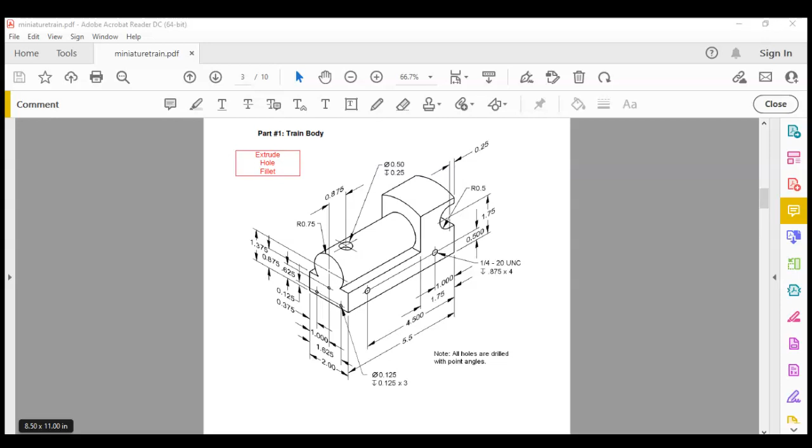I'm showing you this. If you scroll down to the next page, you have another view. There's some stuff you'll need on the back of the train body.

Like I said, it's kind of intimidating. But if they can break it down to things they can determine and know for certain, it makes it a little easier to draw. So what I always look at first is, what do I know? I know that the base of my train is a rectangle.

I'm going to just kind of roughly highlight what I'm talking about here. I know the base of this train is a rectangular shape. And then if you think about carving away the rest of the shape from that, you'll have an idea of how to go about creating the train body.

I know my dimensions for that base rectangle: it's 2 inches by 5.5. There are some other things I can't quite determine yet, but I know that the base is 2 inches by 5.5 inches.

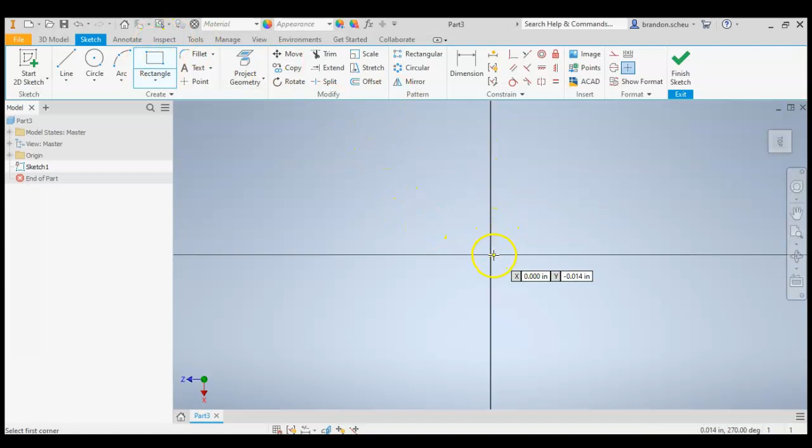I'm going to create a 2-point rectangle. I'm going to start at 0, 0. If you hover over 0, 0, it'll turn green, so I will click and drag. This is a 2-point rectangle, so I'm creating one corner, then clicking and dragging, and I can set the opposite corner.

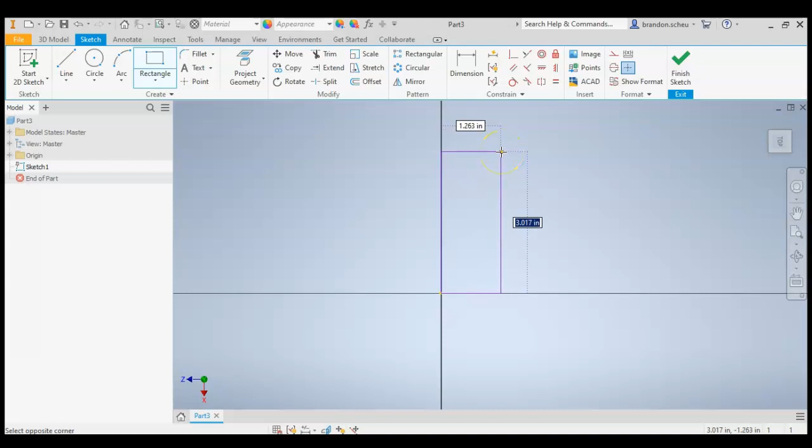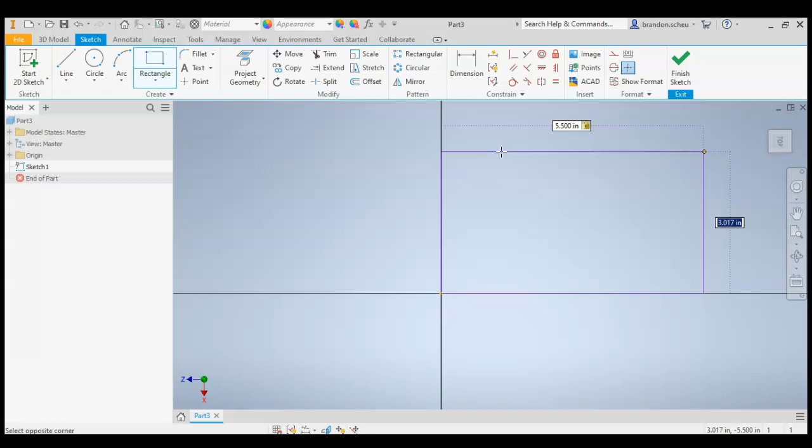My dimensions right now, you can click and drag and see it changes. I can use my tab button and tab in between these two. It probably doesn't matter which one you make the 2-inch and which one you make the 5.5. I'll make this 5.5, then tab, so it highlights my other dimension. That is now highlighted, so I'm going to change that to 2, then hit enter.

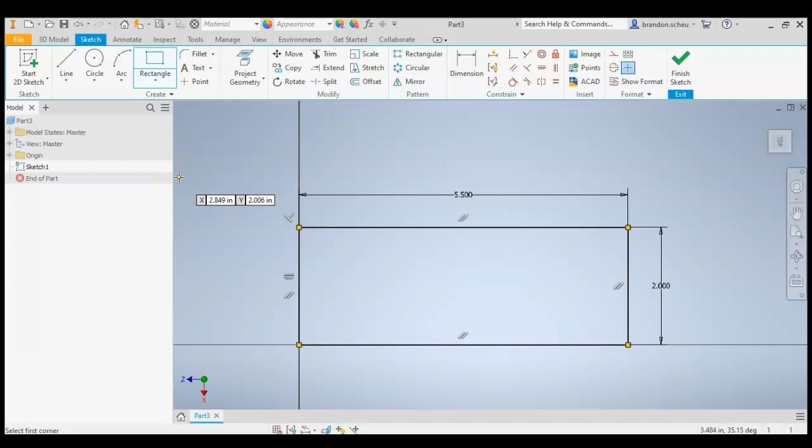Now I have a rectangle similar to my base, the same as my base. It's 5.5 inches long, 2 inches tall. Then I'm going to hit escape, which turns off my tool. You can see my rectangle tool is highlighted here. Hit escape and it turns it off.

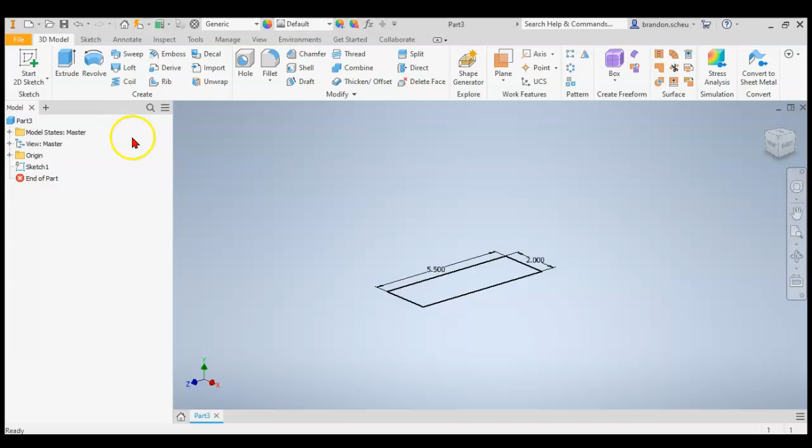Now, if I want to finish this sketch, I'll click the green check mark, finish sketch, and now I'm able to proceed in the 3D model tab. So if we look at it, we know we have now a profile of the base of the train.

I don't have a dimension telling me the exact height of my train, but I have two dimensions I can use to figure it out. I need to know the height of the top of my cab on the back of my train to make sure I have enough material when I extrude.

The top of my train is curved. It's 2.35 with an R next to it. This mini train project is one of the things students are learning—specifications, symbols, things like that. That R stands for radius, so essentially that's just the arc, or a circle with a 2.35 inch radius. That's important to know.

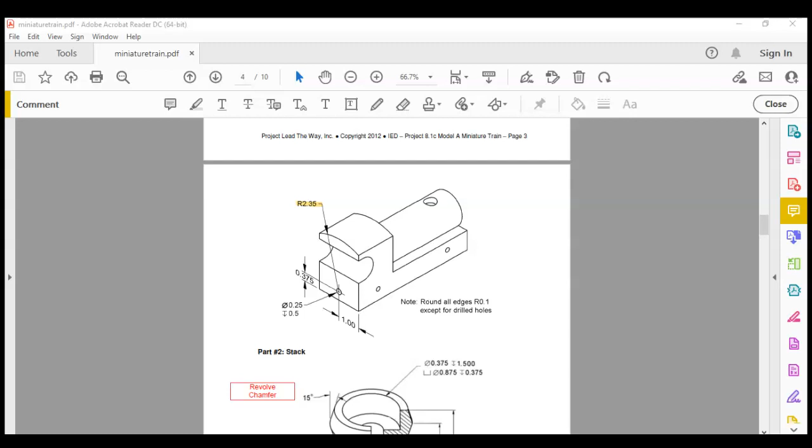The center of my circle—I'll zoom in here—I have a 2.35 radius for the roof, and the center point is 0.375. I'll also have a hole here on the back with a diameter of 1/4 inch and a depth of 0.5, centered at 1 inch and 0.375. But right now I'm making sure I have that covered.

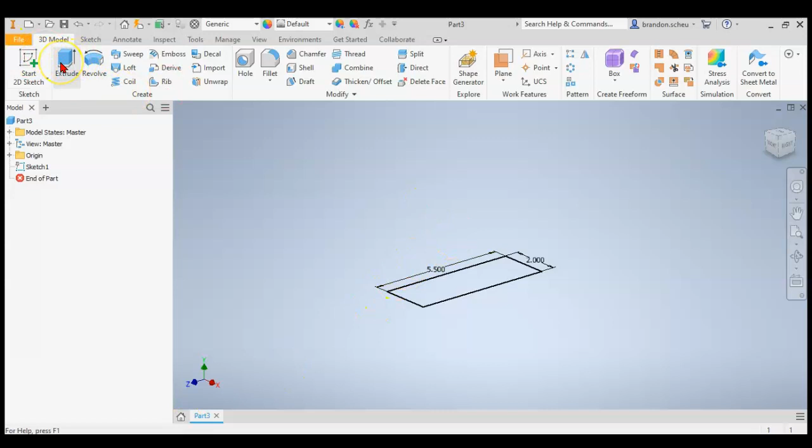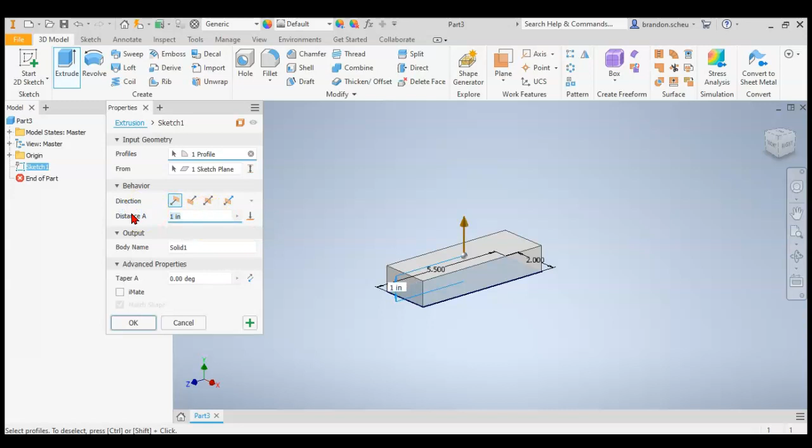I'm worried about extruding and getting plenty of height that I need to work with, so I'm going to extrude. Extrude adds or removes material, so I'll add enough material that I can come back and remove the excess later. I know I need just under 3 inches total height, so I'll add enough—I'll do 5 inches, enter.

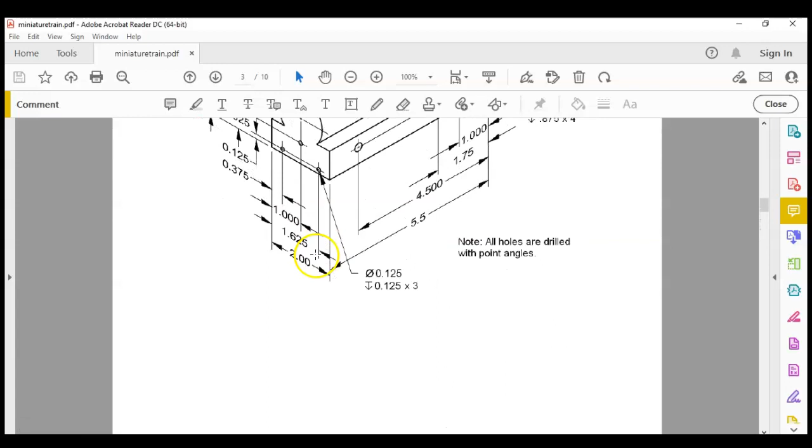Now I have a solid 3D model that I can start creating the rest of my train body with, the rest of the shape. I'm going to try to move this drawing tab out of the way. Now I can create my roof, and I can create the hole here, and then I can create the front profile of my train.

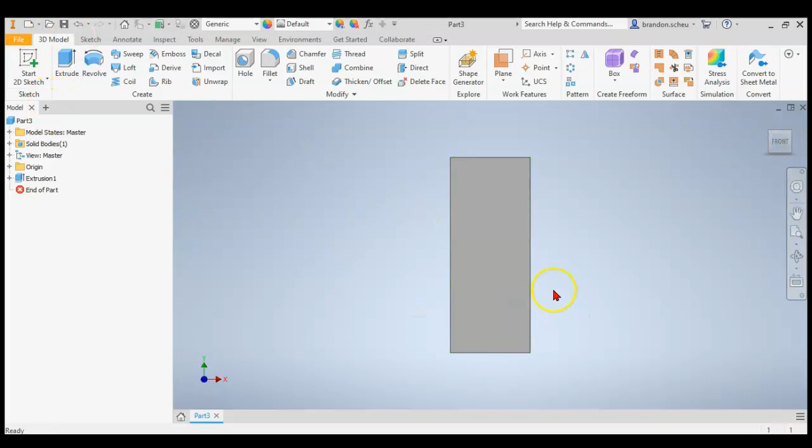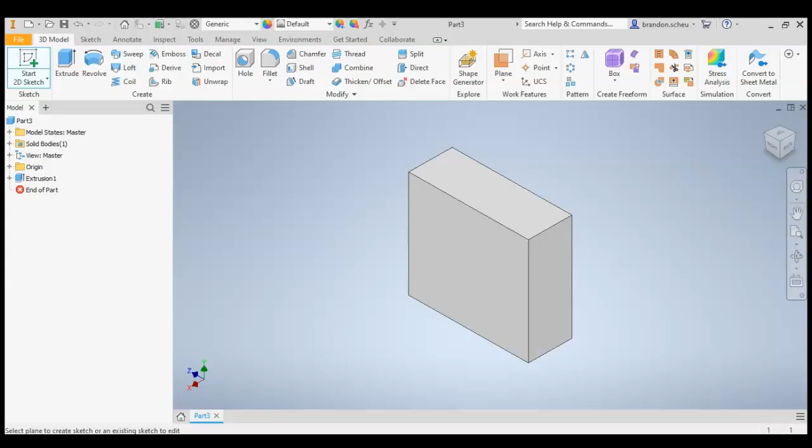Once we have a 3D block to work with, I can start a sketch on any of these faces using the little cube here, where I can click to get different views. I'm going to start on the back view. So in this view, we're working off the back—I'll select the back, start 2D sketch, and then project geometry.

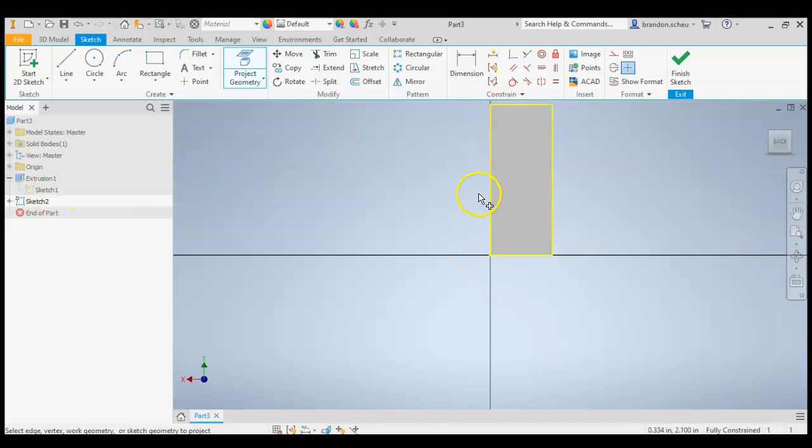Project geometry allows you to reference geometry from a previous sketch. I'm going to project geometry—it's referencing what I extruded here off of sketch 1. I'll select all 4 sides; you can select individually if you want, but I want all 4. What I'm going to do first, which saves time, is the hole here for the hitch peg.

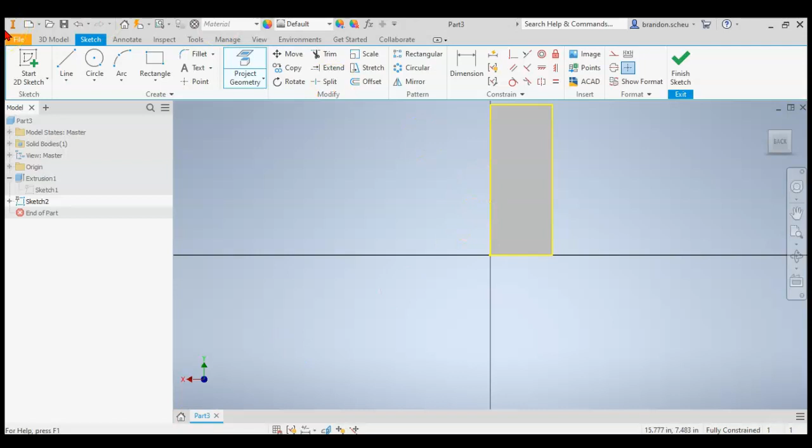If I do that first, then I can reference it to do the roof. If I did the roof first, I'd have to do this twice. I'm going to select the point—you can do a circle, but I'll select the point. With the geometry referenced, it'll click at the center point. Going on my X here, the width, it'll click at 1, and I can tab to take me to the coordinates. I know the center point is at 1 and 0.375.

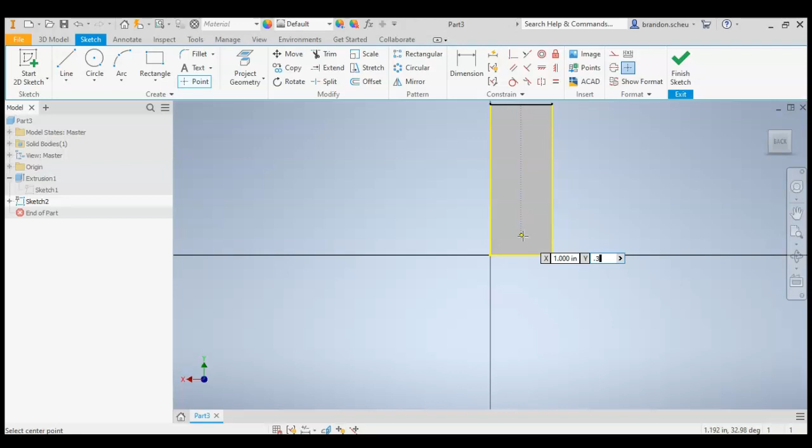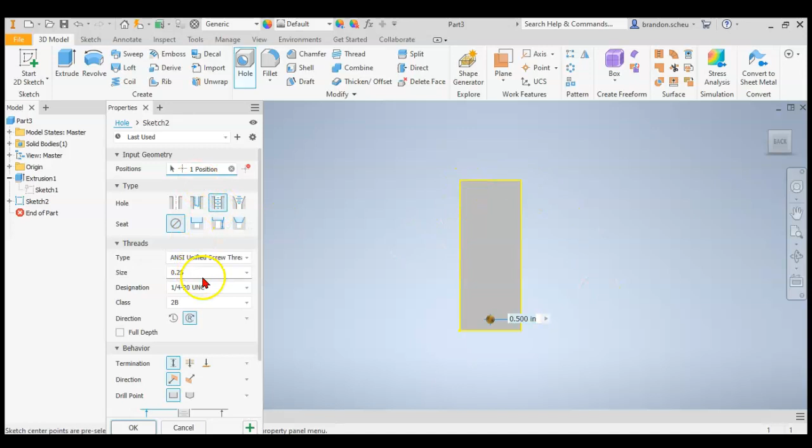I'll select, hit enter, then finish sketch. I'll go to the hole tool—I know this hole is 1/4 inch by 1/2 inch deep. I don't want it threaded, so I'll go to simple hole, and I don't want a seat. I want to specify the distance: 1/2 inch deep, and it's 1/4 inch wide. Then I'll hit OK—that gives me my hole for my hitch peg, with the diameter and the depth.

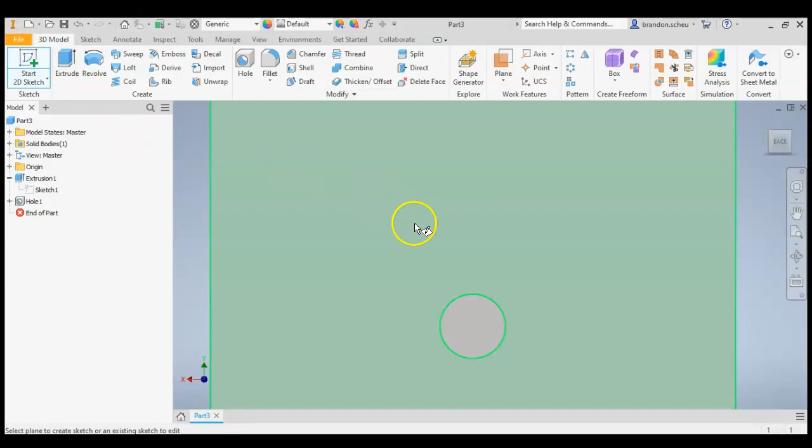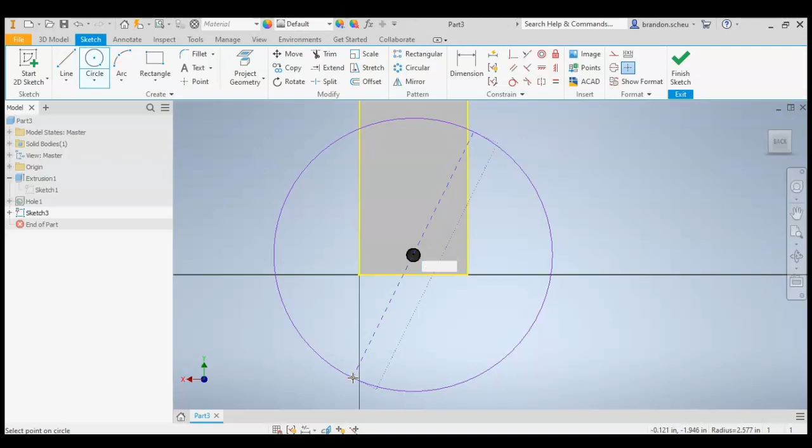Now I'll come back and start another sketch. I'll project geometry, and then just create a circle—you can use an arc as well, but a circle is a lot faster. In my drawings, it's a radius of 2.35. My circle's dimension is diameter, so I'll do 2.35 times 2 to give me the diameter. Now I have a circle, or really the arc, on my profile.

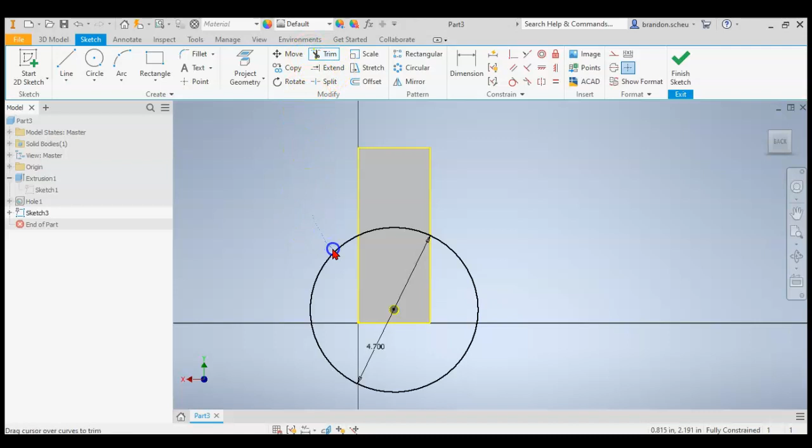To keep things nice and clean, I'll use trim—trim the excess, and then I have my arc. I'll finish sketch, and then extrude. If I hover over each of these closed profiles, it highlights them green. Green means I'm adding material here—I want to remove.

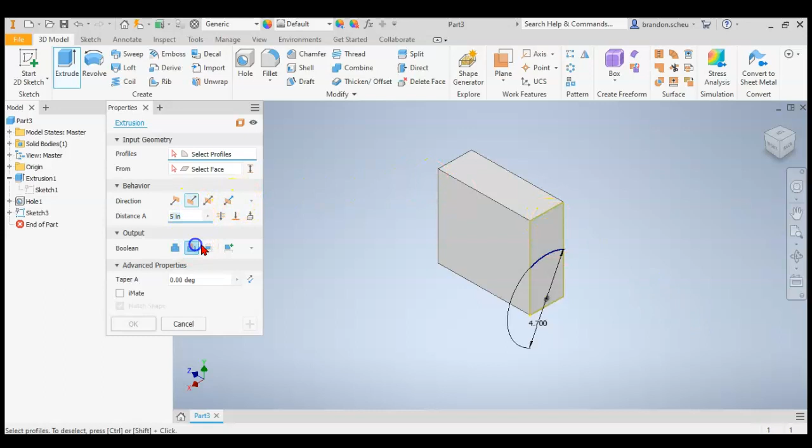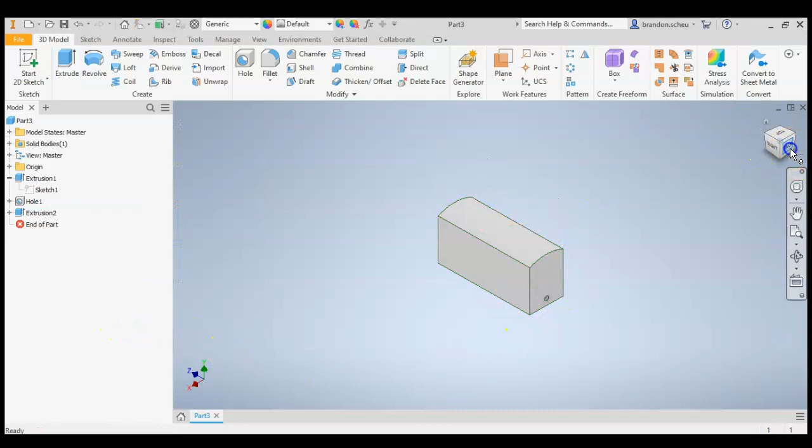I'm going to select the entire distance, so I'll go 5.5 inches. You can go more, that part doesn't really matter in this instance. Now I have the profile of the roof of my cab of my train. There's a lot more work we'll need to do, but I have the profile of the train.

Now the next thing I'm going to do is work on the front. The front's probably the most intimidating to a lot of students because there's a lot of numbers and a lot of lines, and they're not real sure on where things are supposed to go.

So I know I have two basic shapes, a rectangle and a circle. The center of my circle is at 1 and 1.375, with a radius of 0.75. Then I have a rectangle that is 2 inches wide by 0.875 inches tall.

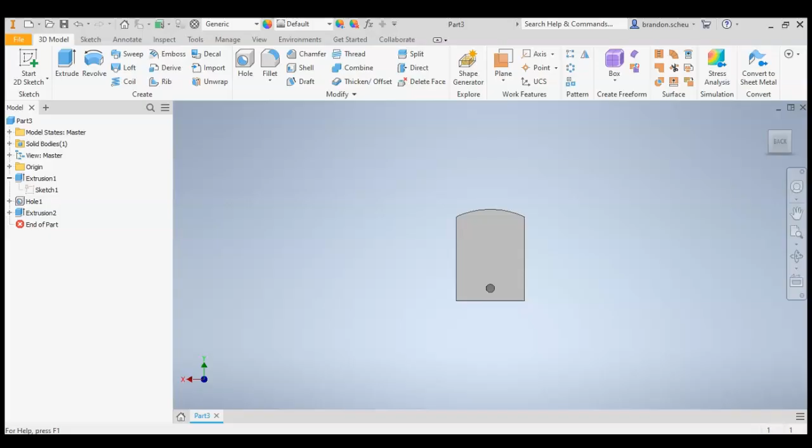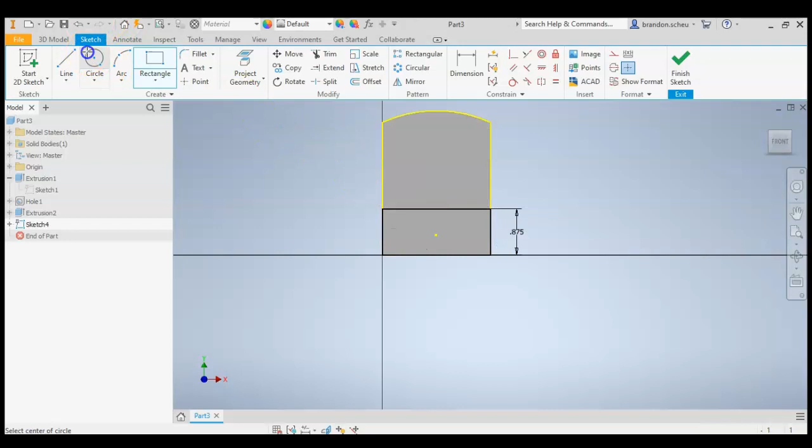I'm going to start a sketch on the front and project geometry. I'm going to use a 2-point rectangle, then tab to my height, 0.875. For my circle, I know the X is 1, and 1.375 for the Y. It is 3/4 of an inch, 0.75 radius, so I want to multiply that by 2.

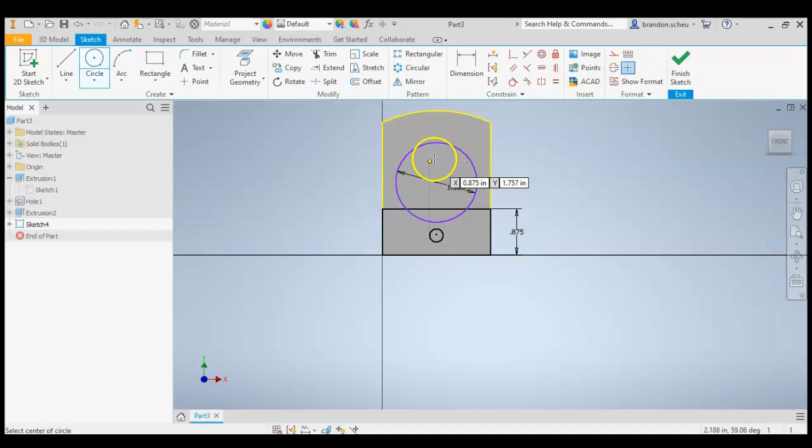Now I want the circle and the rectangle to join, so I'm going to trim the overlap here, and now I have the profile that I want. I'm going to finish the sketch.

I'm going to extrude again to remove. In this case, I don't want to go the whole distance, I will remove my cab if I do that. So I need to figure out how wide my cab is. My cab is 1.75 inches wide, and I'm extruding from the front going back, so I need to find the distance between 5.5 and 1.75.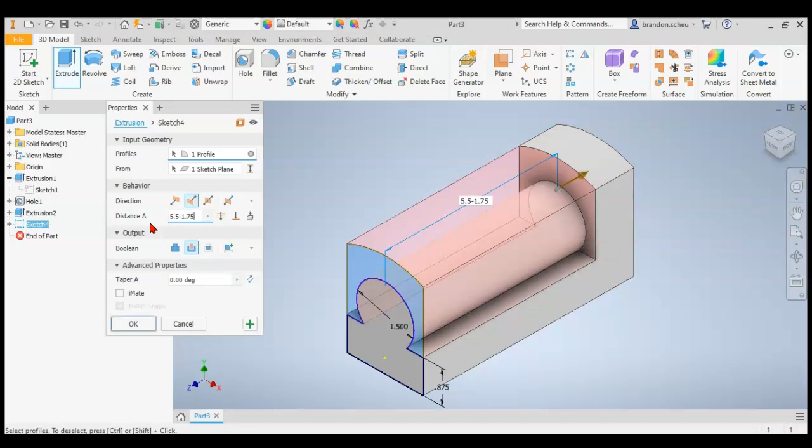You've seen me do it already with the diameter. In Inventor, you can just do the calculations right in the dimensions here. So I'm going to do 5.5 minus 1.75, hit OK, and it gives me now my cab. It gives me what would be the boiler and kind of the front shape of my train.

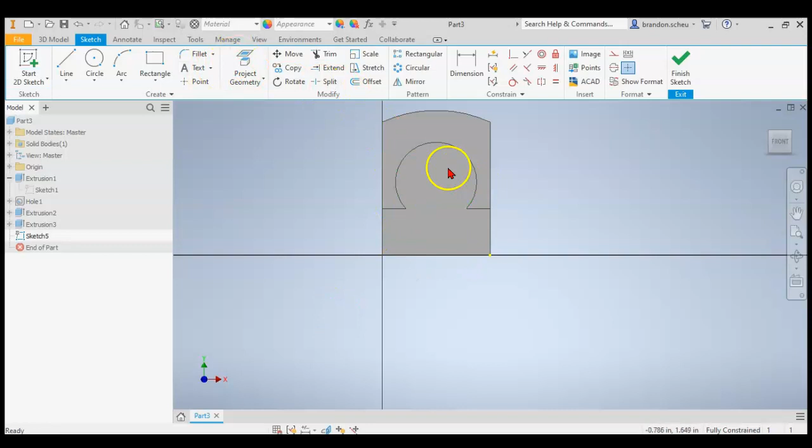Now I need to do a few things. I have to do the holes on the front for the cow catcher. So I'm going to start a 2D sketch on the front, select the very front of the train. I'm going to put in some points, and I'm just going to kind of randomly place them.

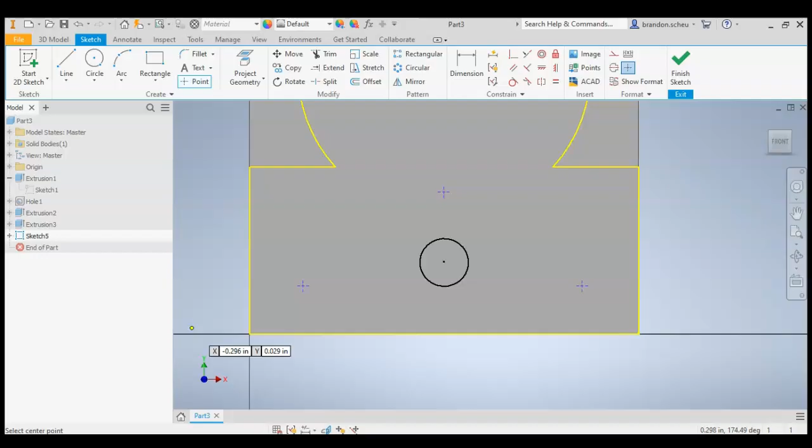Now we can go back and look at our drawings. I know my center, or the top hole, is 0.625 inches high, and it's centered at 1 inch. Then my bottom two holes are 0.125 inches from the bottom, and they are 0.375 inches from the side.

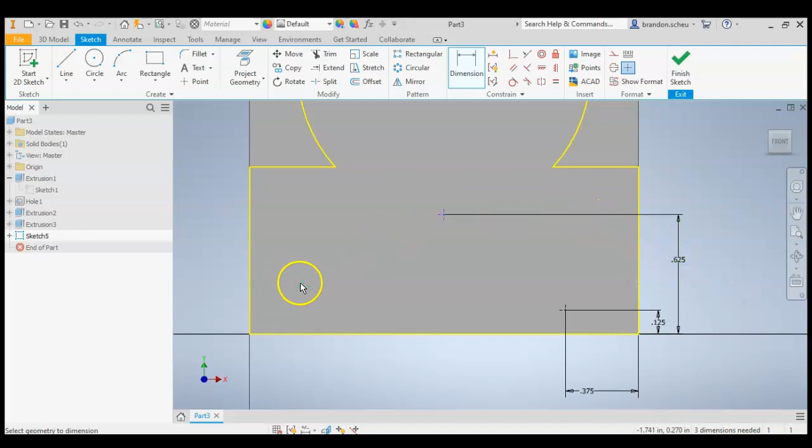I like to use the dimension tool. Here you can add dimensions pretty quickly, so you can draw a lot faster using it. I already know that is in the center when I placed it, and then add the last couple of dimensions here.

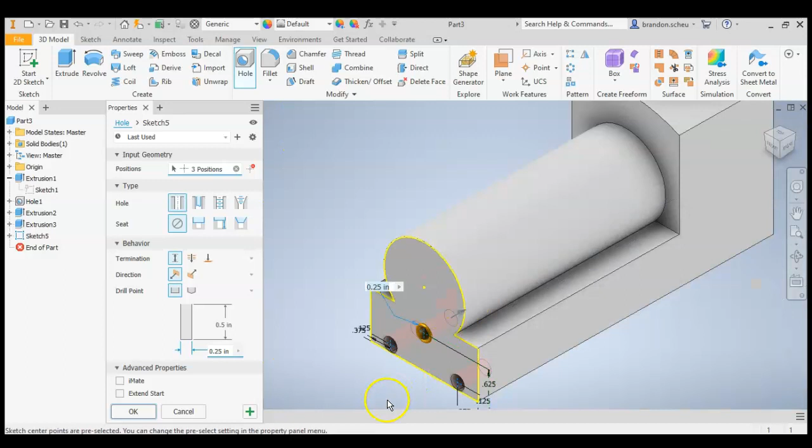Finish sketch. Again, I'm going to do the hole. I use the hole tool and it will automatically select, so I'm just putting points at my center. I'm putting the center points, and then it will automatically put the holes for me. My holes are 1/8 inch in diameter and 1/8 inch deep.

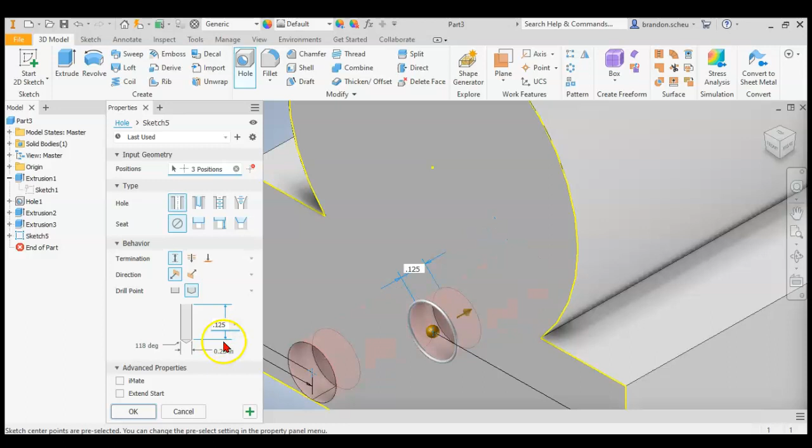And then all holes are drilled with point angles. That's one of the details that a lot of students will skip over, but it's important for them to read all the notes. So it is a simple hole, the drill point is angled, and it is 1/8 inch deep, 1/8 inch in diameter. I hit OK, and now I have my 3 holes for the cow catcher.

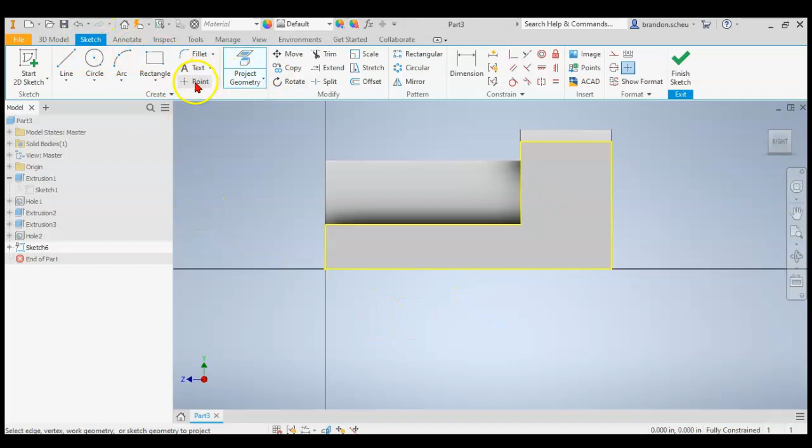I'm going to do the holes for my axle pegs. Start a 2D sketch, project geometry. Again, I'm just going to place points. Like I said, this is, to me, a lot faster than trying to get it exactly where I want it, and before I do that, I want to go back and look.

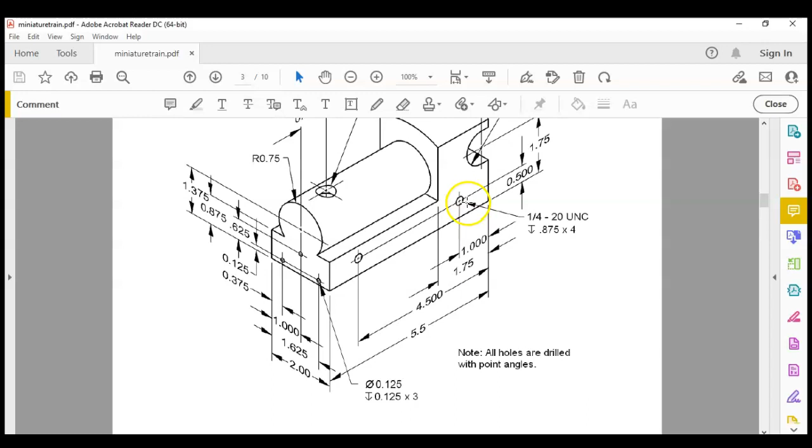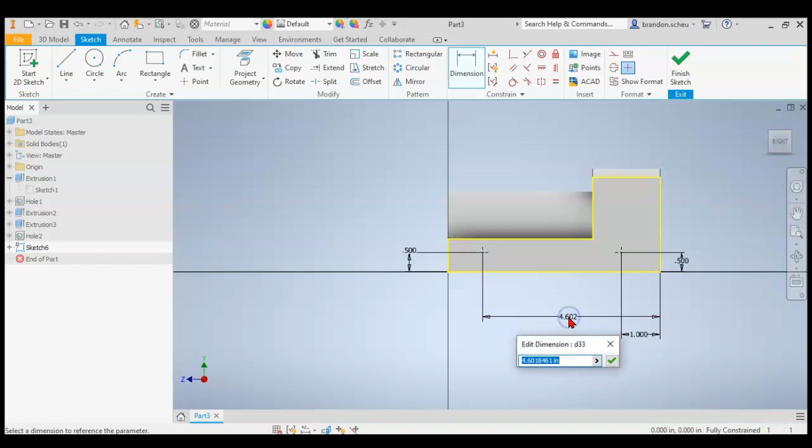So my hole is 1 inch from the back and a 1/2 inch up for the back hole, and then 4.5 inches to the front hole. So: 1 inch and 1/2 inch, 1/2 inch, and then it's 4.5 inches from the back. So finish sketch.

Now we look closely at these holes. They are 1/4 inch by 20 UNC. That means this hole is tapped or threaded, and they are 7/8 inch deep. This times 4 means you can assume the opposite side is the same, so we'll have 2 holes on this side, 2 holes on the other.

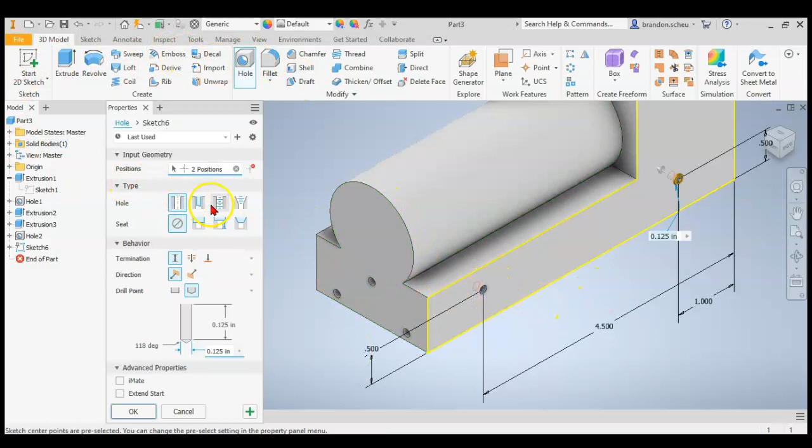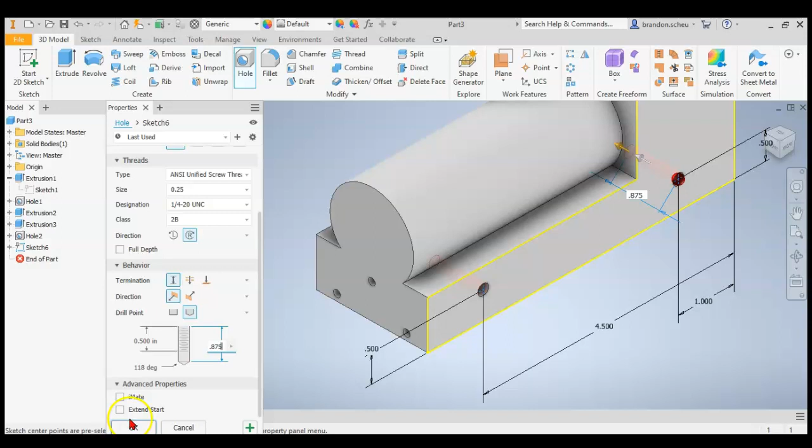We will do it the same way. It's 1/4 inch, but instead of the hole being a simple hole, we're going to click tapped hole, and then we're going to specify our designation here. We'll go to 1/4 inch, quarter inch by 20 UNC, and then the depth is 0.875. Hit OK. So if you scroll in, we have threaded holes on that side.

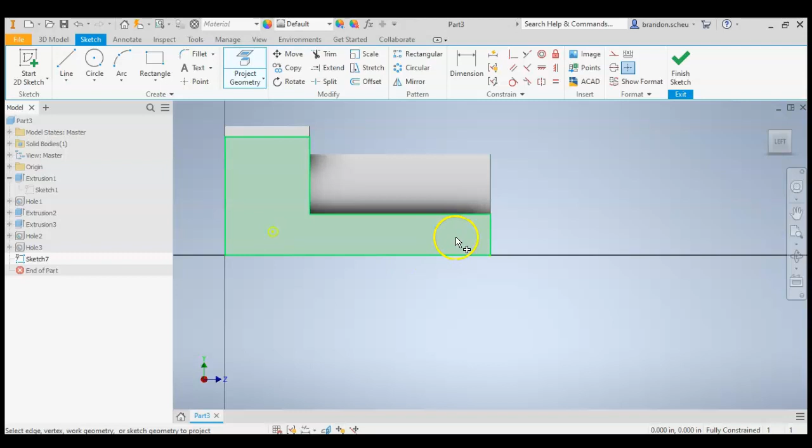We'll do the opposite side. Now that we already have those holes in place, all we have to do is project geometry, select our holes, finish sketch, select the hole tool, select our center point, and everything stays the same in our settings. Hit OK, and we have those holes done.

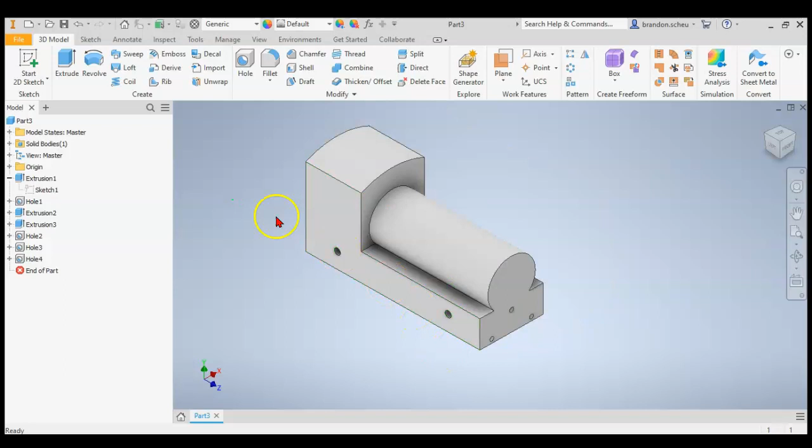The last thing we need to do is our window. So I'm going to start a 2D sketch. You can do it on either side; I do it on this side because that's where our drawing is. It is a 1 inch circle that is offset 1.75 inches from the bottom and 1/4 inch from the edge.

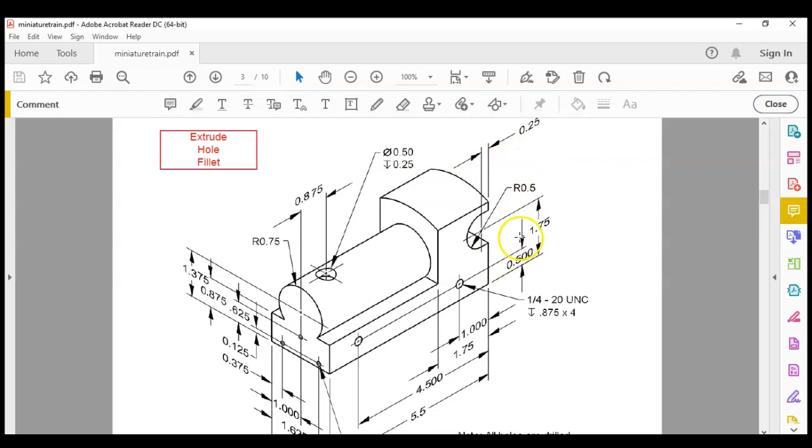A lot of students will miss this flat part here. So you have a circle and then it comes straight back.

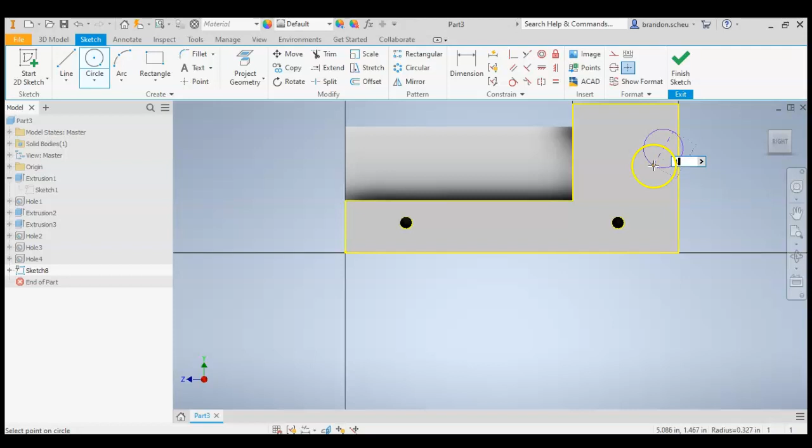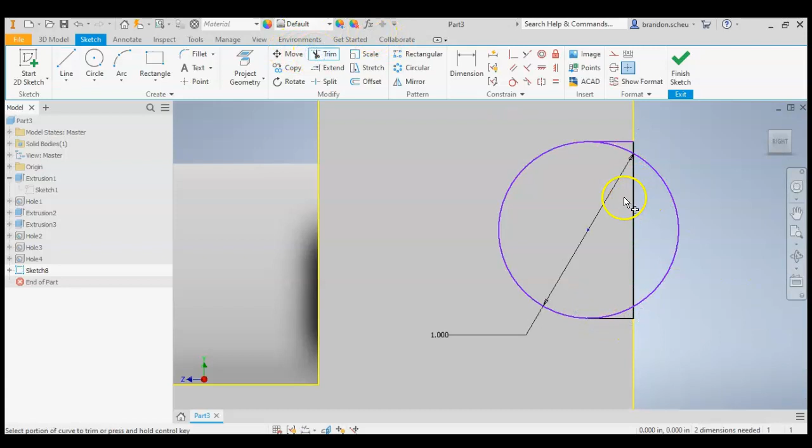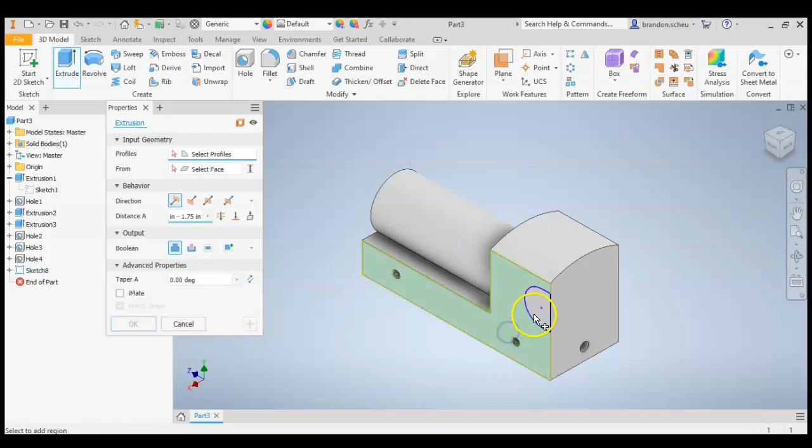So we're going to come from the top, and then I'm going to use trim, and trim. Now it's kind of a backwards D, but it does have the flat portion there. So extrude—if you click the wrong thing, you can hit Control, select the profile, and it will remove it. Select the right one. We're going to click and have it flipped, and it's a cut.

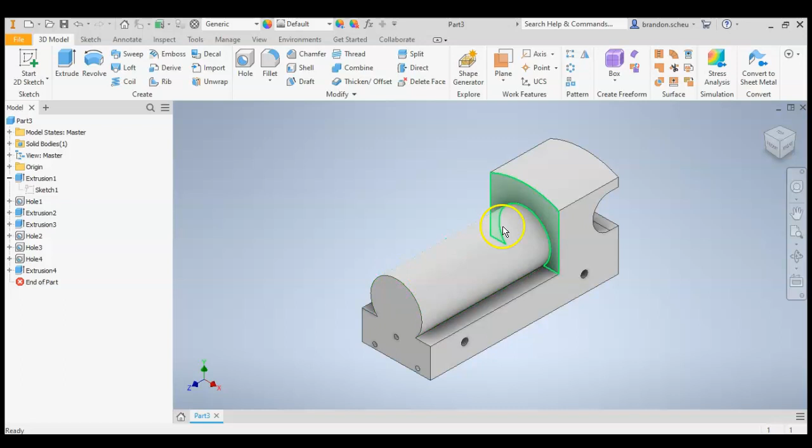So now we have our window. I thought that was the last one, but we have one or two things left. The first is our hole for our smokestack.

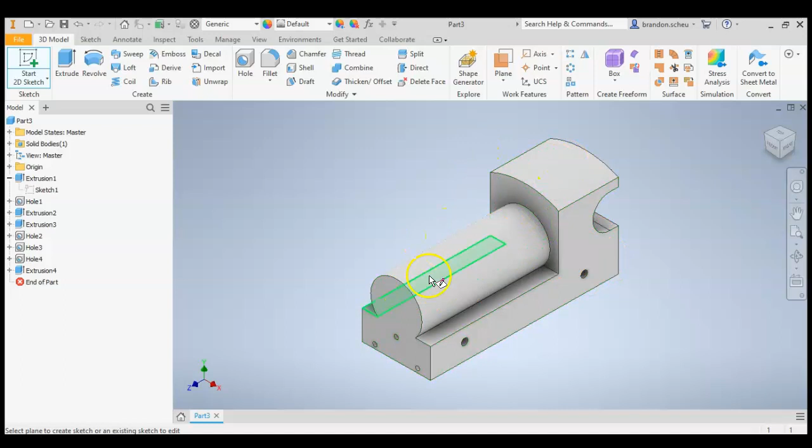So looking at our smokestack, we have a hole on top of our cylinder, what you'd consider the boiler. We can't just click on a cylinder like we do the flat faces. We can't just start a 2D sketch on a cylinder or a round shape. You notice we can do it on the flat sides, but we can't do it on something that is curved.

So what we'll have to do is use the height of the top of our cylinder here. It is 1.375 plus 0.75—that gives us the height—and we will have to use a work plane.

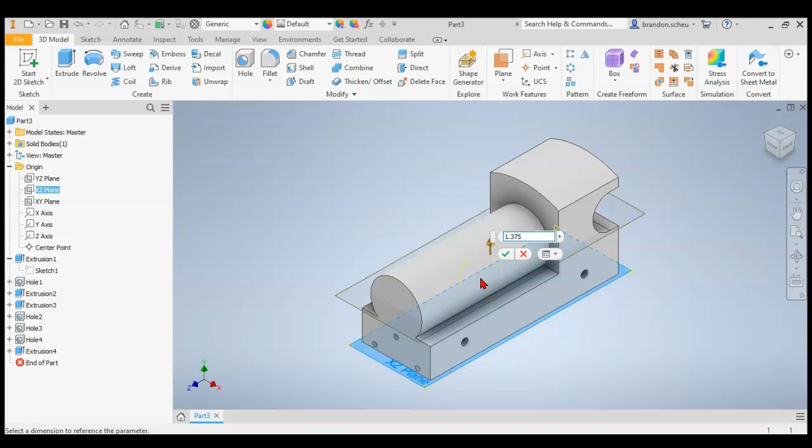If you come to plane here, you can do offset plane. We'll come over to our model browser to origin, and since we started on the XZ plane, we're going to offset from the XZ plane. Our center point of the circle is 1.375, and then we're going to add the radius, and that will put us—you can see this work plane moving up—right at the very top.

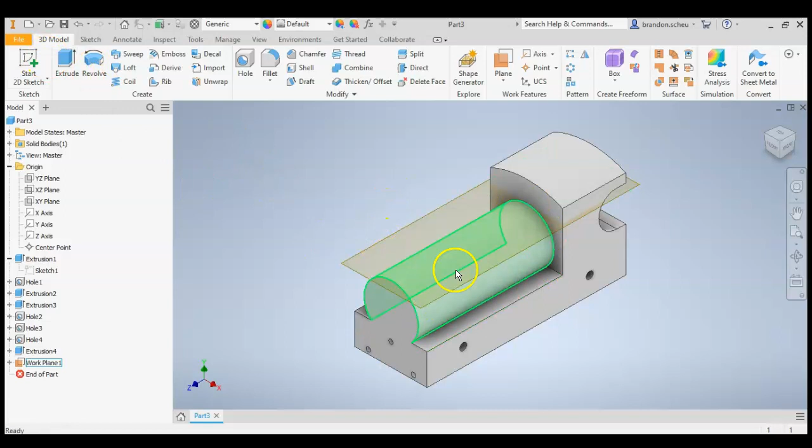This work plane is going to allow us to create our profile for the hole, and then we will extrude and actually create the hole. But like I said, you can't just start a sketch on a circular or curved object.

So now you can work on this plane just like any other plane. There are other options for planes—one we use quite a bit is the 3-point plane, or angled plane. Those are pretty common ones that I use.

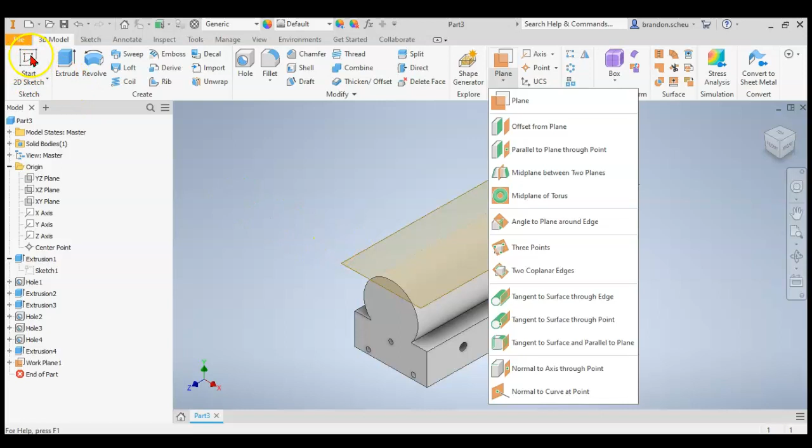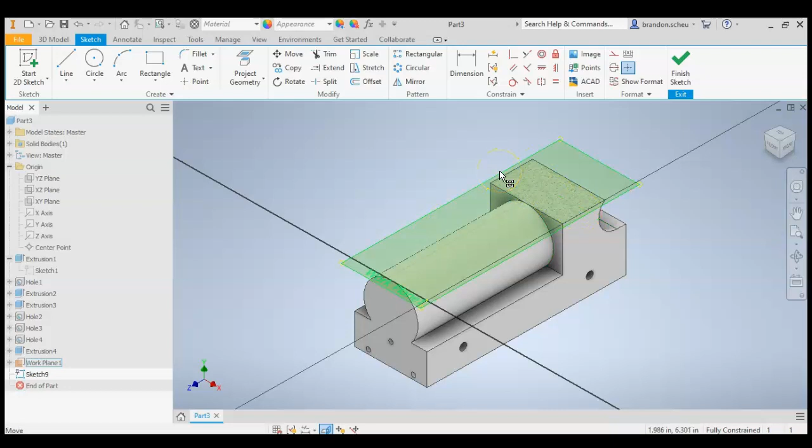Start a 2D sketch, I'm going to select the work plane, and you notice in my browser that plane is listed as work plane 1. One thing I'll show you: if you need to work on something and need to remove some material to see, you can hit F7 and it will cut. You notice here where my work plane cuts through the cab. I'll turn it back on.

Now, our hole is 0.875 inches from the front of our train. It is a 1/2 inch diameter hole, 1/4 inch deep. And so now I will change my view.

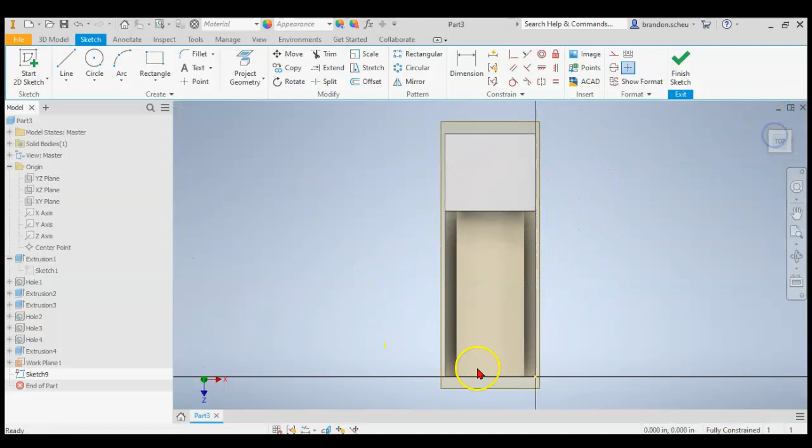I'm going to project geometry so I can reference from the front here. Tab, it's the center point. And you'll notice, depending on how your drawing's set up, it is going negative. Negative's just this direction, so I'll do negative 0.875. Hit enter. Diameter of my hole is 1/2 inch.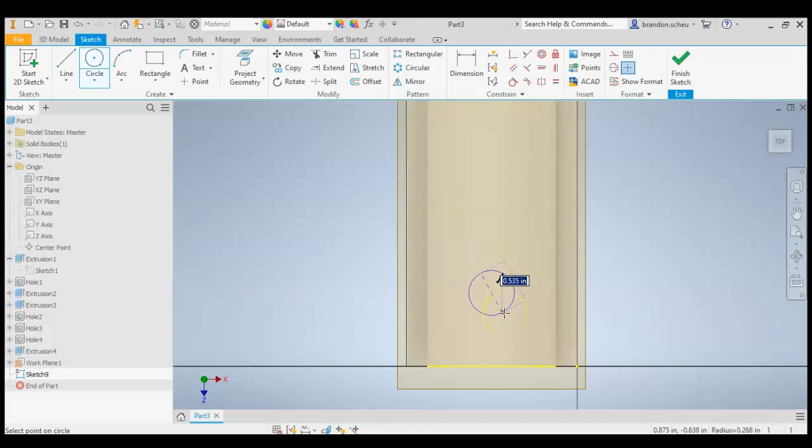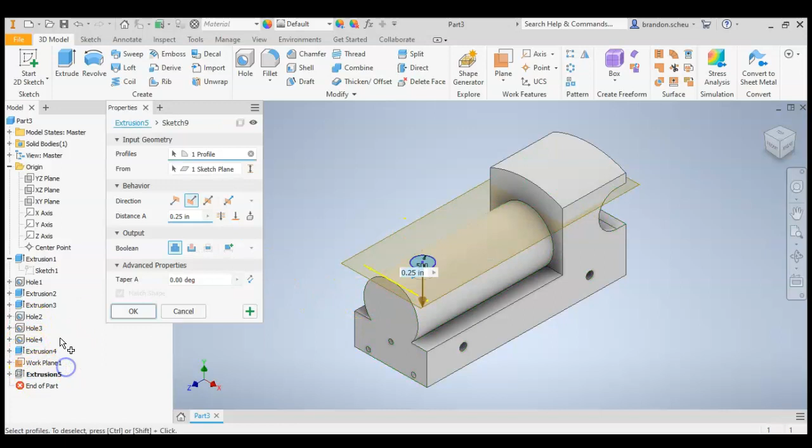Finish sketch. I will extrude. Now it's set to add. I want to cut, and I only want to go 1/4 inch. So 1/4 inch. Okay, oh, it still added. I'm going to come back, double click on it, cut, and now we have our hole for our smokestack.

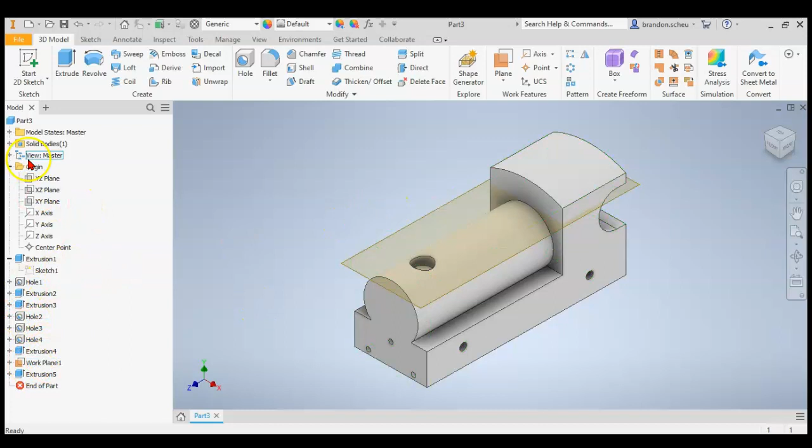Now, if you were to import this into an assembly and leave this work plane visible, it's going to get pretty cluttered and kind of skew your vision, or get in the way. You do not want to delete it out of your model browser, but you can turn it off. So right click, model browser, select or uncheck visibility, it turns it off. You can add it back if you want.

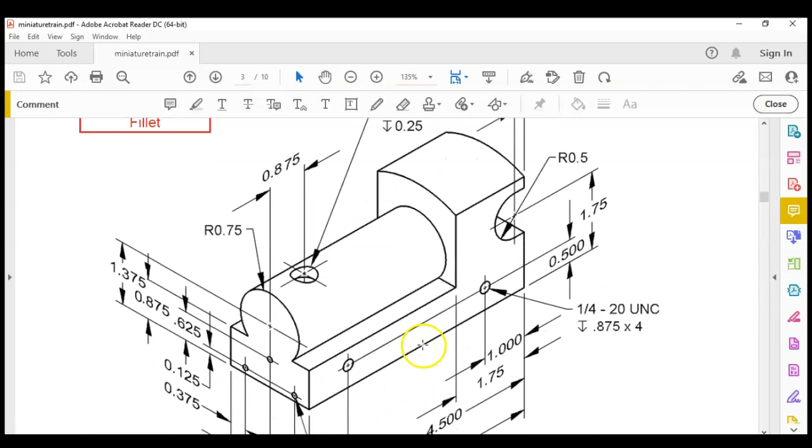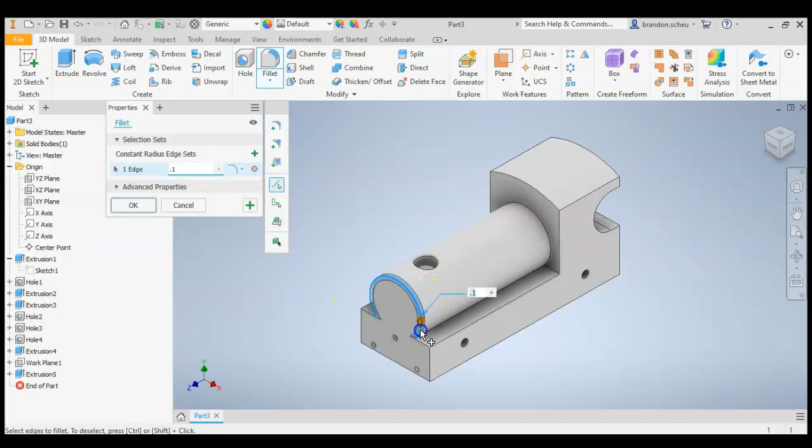And so now we have all the main features of our train body. The last thing in the notes, it's specified, if you scroll down to the second view, round all edges, radius 0.1, except for drilled holes. And so we're going to come to the fillet tool, 0.1, and then we're going to select all of our edges except for our holes.

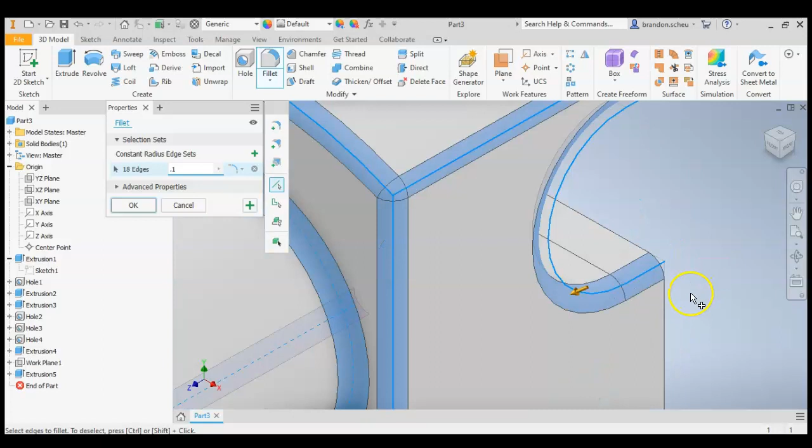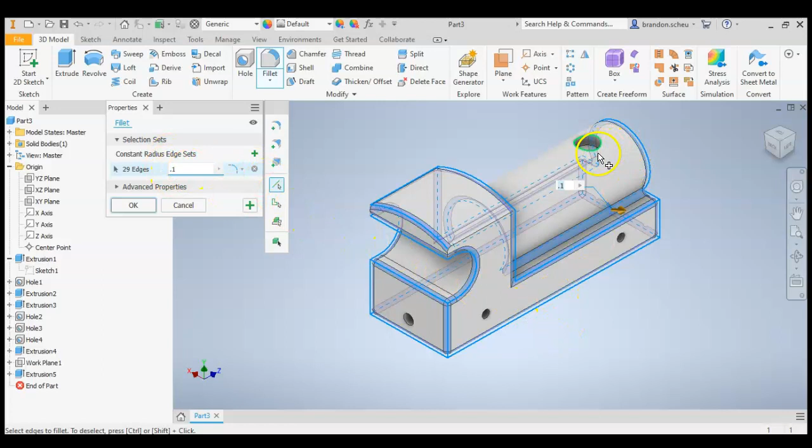Then we'll be done with our model train, the train body, which is part 1. And so I'll go ahead and finish doing this. Sometimes on this fillet tool, you've got to make sure you change your dimensions at the beginning, because if you try to click on some and then change, it doesn't always cooperate. And now I'm going to hit OK, and so you can see that all the corners are rounded now.

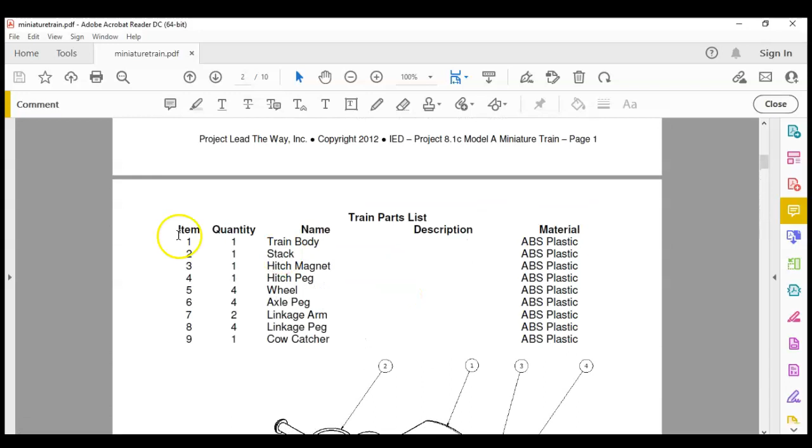A couple of other things. If we look at our drawings here, under parts, it specifies that the material is ABS plastic for all parts. So I'm going to come to my top toolbar, scroll up to material, select ABS plastic. Under default, so I'll show you real quick, default or generic - generic has no properties. Inventor has a lot of different materials in its library, and you can select any of them, and it will assign those characteristics to that part.

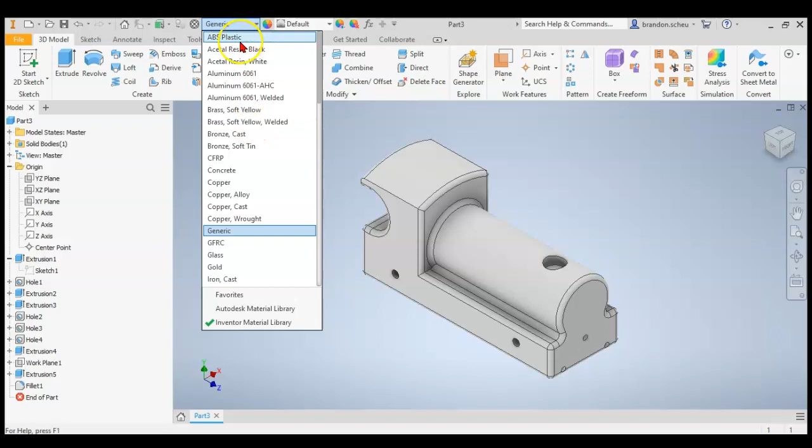Generic, there's nothing to it, but if I go to ABS plastic, I can go to File, iProperties, Physical, and then update it. It will give me accurate weight. And so once I do this, I assign it materials and I do this.

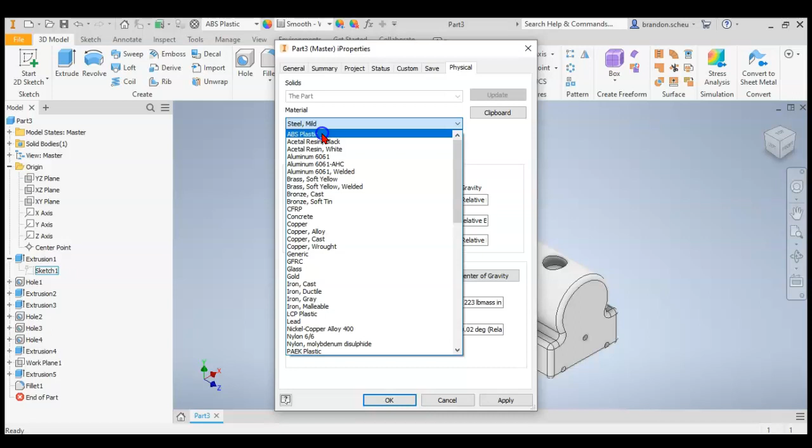Like I said, you can change materials. Let's change it to mild steel. So with mild steel, that part would weigh 5 3/4 pounds. And this is pretty accurate. Now it's probably not always 100%, but it is a pretty accurate weight. But you can hit, so you'll have it assigned as the material.

And then the last thing is when you save this, or your students save it, a couple of things: they need to make sure that they are saving it to a flash drive or external hard drive. The first time you save a part, you'll save as, select - so I have an external hard drive, and I have a ton of folders on it, so I'm going to save it in my folder. I have a folder just for the Inventor files.

And then students need to make sure that they are labeling it with something that is accurate on the description. I would label them as the part number and then underscore their first and last name. And so I will save it as part 1. You can do part 1 train body, but when you have a bunch of kids that are doing this, it is important that they save it in the same place every time.

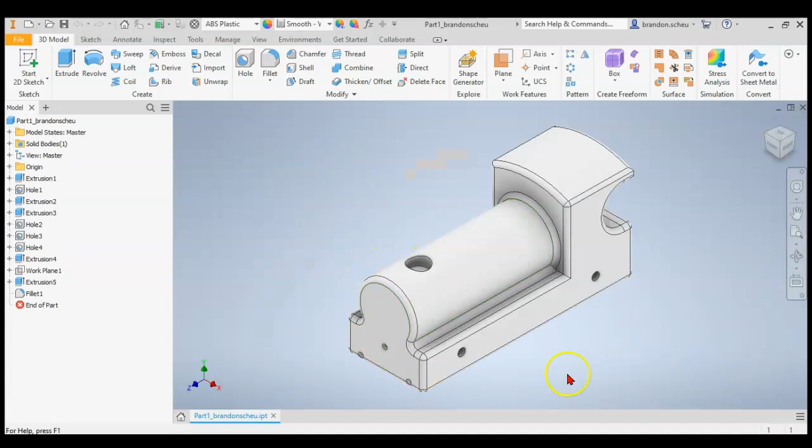So all parts are saved in the same folder, and it's saved on an external device like a flash drive or external hard drive. That way, if they happen to get on a different computer, they have all their files, and it's easily accessed. You'll save, and then if I do any work on this or modify it anyway, all you have to do is click the Save button at the top of your screen, and it saves. But like I said, that is the train body, so stay tuned for the rest of the parts, and thank you.